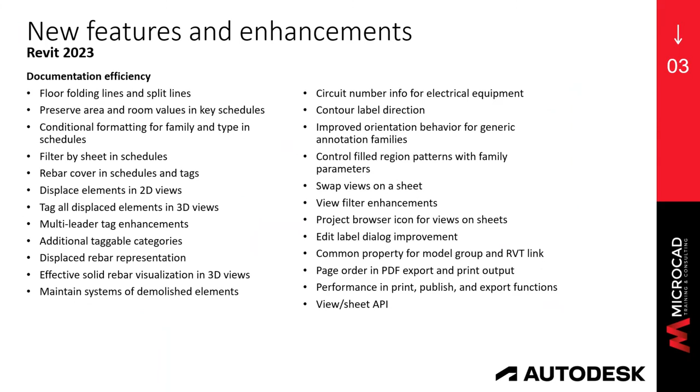Incredible release, huge amount of changes. Just to give you a little bit of an overview, we are not going to see all of them, but my next 3 slides contain all the changes that happened in this release. To make a very long story short, this release has over 70 new features or changes to existing features.

50% of those happened because of user input. I don't know if you guys are aware, but Autodesk listens. Surprise, surprise, Autodesk does listen to the end users. How can you make your voice be heard? There is a website called AUGI, Autodesk Users Group International. You can become members of AUGI, and then you can vote. This release, as I said, 50% of it is user driven.

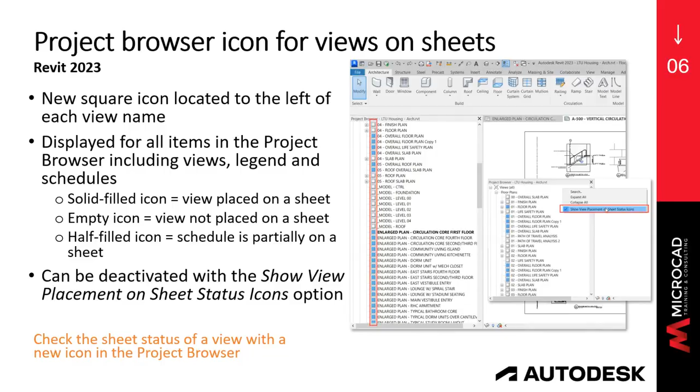So let's dive into it, and I am going to be jumping a little bit between the slides and my Revit interface. The first thing that I'm going to mention is that there is a new icon in your project browser. So let me jump to my Revit interface. Let me select Revit here real fast. And now you see my Revit interface, and if you see in the project browser, there are these funky looking square icons in front of my views.

Some of those square icons are filled out with a blue filling, and that blue filling is telling me that those views are loaded onto sheets, which I found to be very, very useful, because usually you need to select the view and figure out if they are on a sheet. You need to scroll down here, so it becomes so much more visually easy to find.

If you don't want to see them in the project browser and the views, you can right click, and this is where those icons get turned on: show view placement on sheet status icon, that is what it is. I leave them on because the minute I saw them, I was like, yay, me like useful stuff.

Next, and this is straight for MEP, it is huge, it is very, very cool. Let me just grab this air terminal schedule and remove it from this. No, let me leave it on the sheet. Let me show you something new that they added to my schedules.

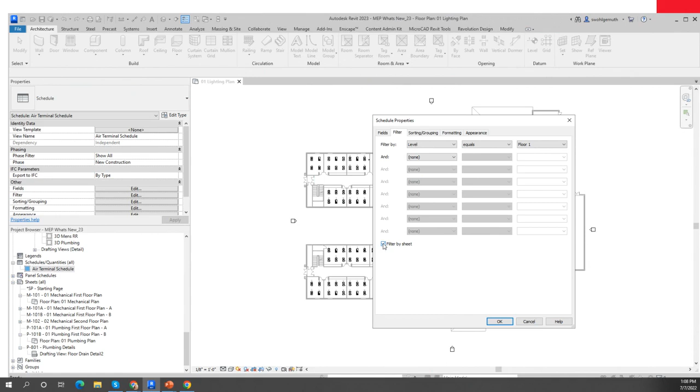So I'm not going to filter right now, and I'm going to show you the sheet where this guy is loaded on. I know it's loaded because it's telling me that it is on a floor plan view, on a view, and it's on this floor plan view. And that is the extents.

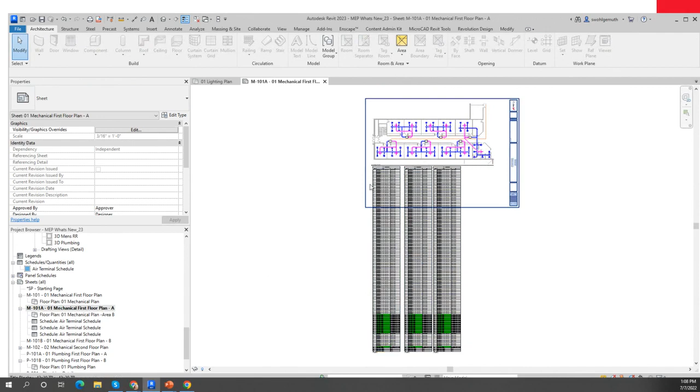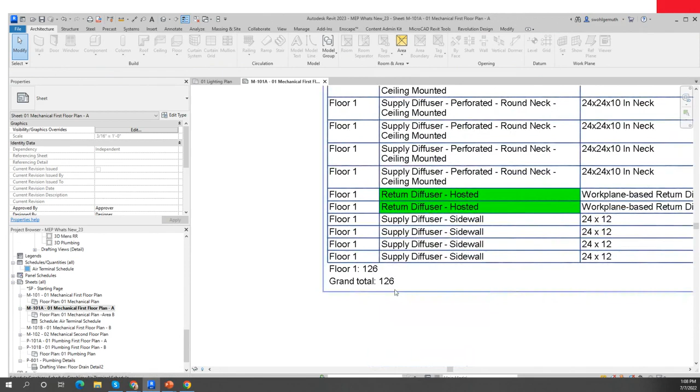Actually, I don't need these guys here, I will need them later on. Sorry about that. This is my air terminal schedule for the whole project—actually, not for the whole project, just for level 1. Notice that it's just for the first floor, and it's calling out all the diffusers that are in that level 1.

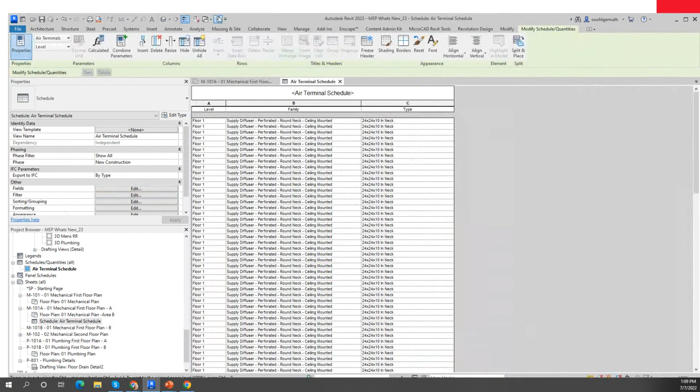If I go back and go to my schedule view, and I go to the filter—let me cancel out of here and let me tile the view so that you can see it nice and clearly.

If I go to my filter and go filter by sheet, boom, now I only see the diffusers that are on the sheet. The way you saw it when you came in, I had just broken up the schedule inside the sheet. To me, that was huge. So many times I have needed to do this.

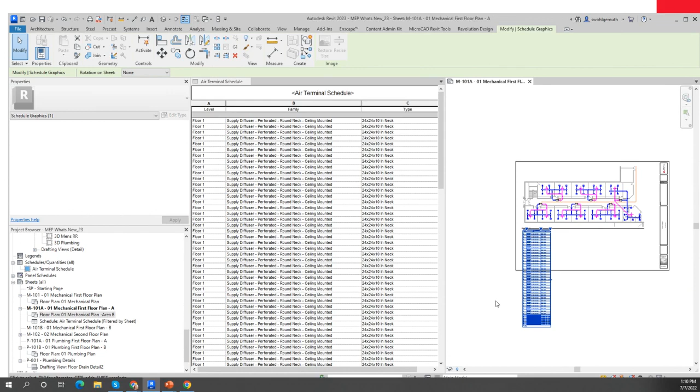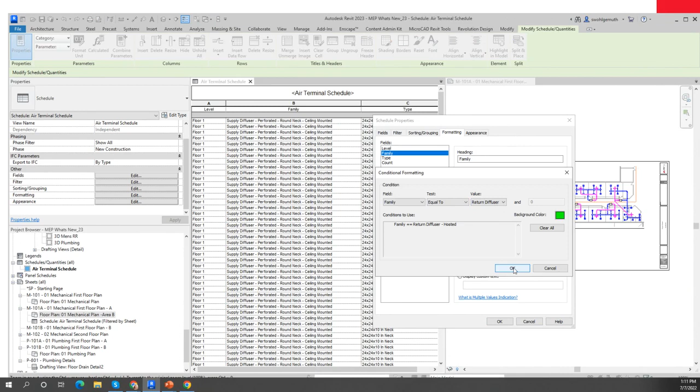Where is it useful? I can highlight with different colors. I decided that I wanted to highlight my return diffusers, so here are my return diffusers. I could highlight whatever family I need to make sure I can separate them, clarify them, make them more visible in my views. I can now add conditional formatting for family or for type or for family and type, and they can be configured independently.

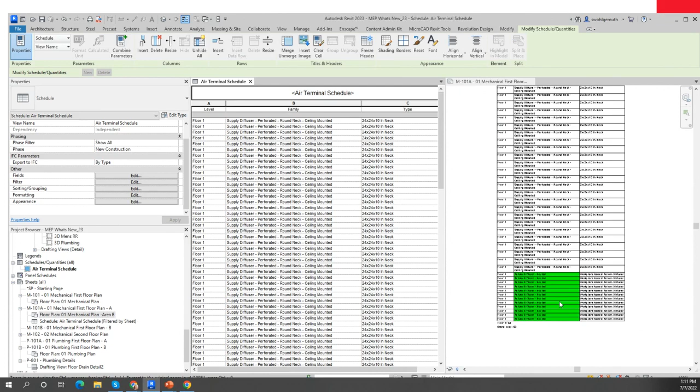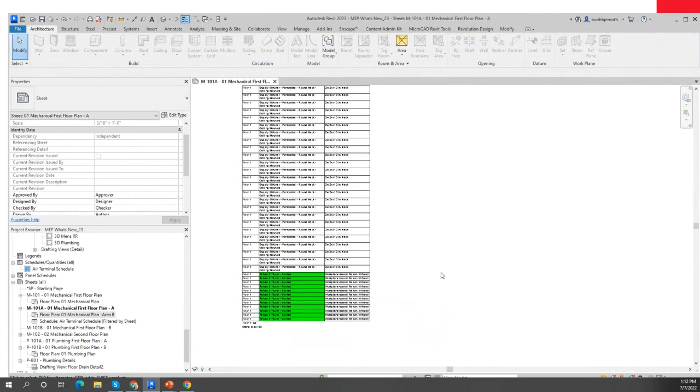Next item that I want to show you, huge. I don't know if you ever fell into an issue that used to happen to me a lot, which is organizing my print sets, printing out of Revit without having a PDF writer in my computer. Impossible, right? You had to have Revit, you had to have a PDF writer.

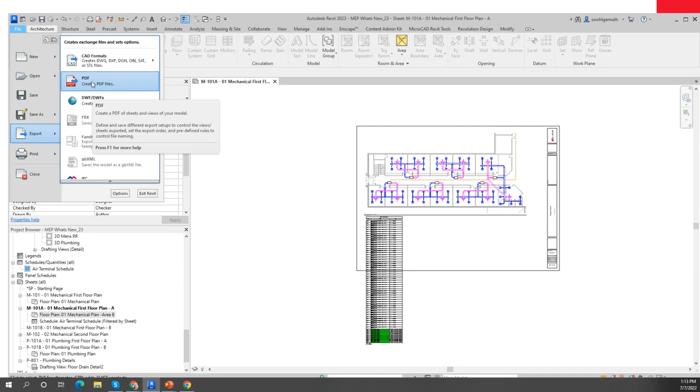As of the release 2022, you can go to your file export command and export to PDF. But you can not only export to PDF within Revit, now you can change the print order of your PDFs, which is huge, humongous. We always had to make the print set, and it did not matter how many subcategories and how organized I had my project browser and my filters and my organization of the print set. This is something that is just available now.

Where is it available from? I can set a print setup, so I can choose whatever sheets I want to print. I'm going to print all my mechanical and all my plumbing sheets. This is the order in which they're coming out right now. But the minute I have a print setup, I can edit the print order, and I can drag and drop. So if I want to push up the whole plumbing package in my print set before the mechanical package, that's the way I do it.

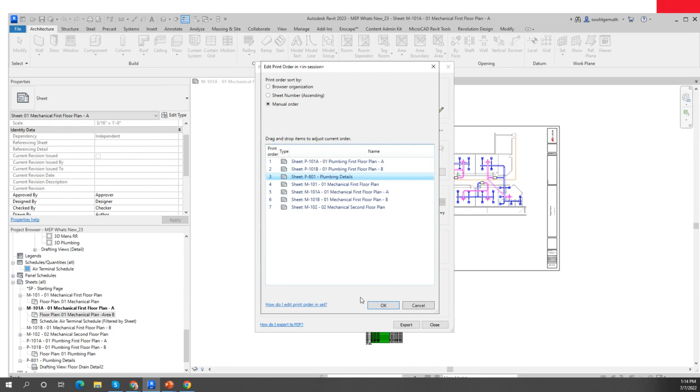Okay, I set this here in the print order as manual. I organize my print order, I click OK. And then I can select this, and I can send it out to print, and it will print in that order.

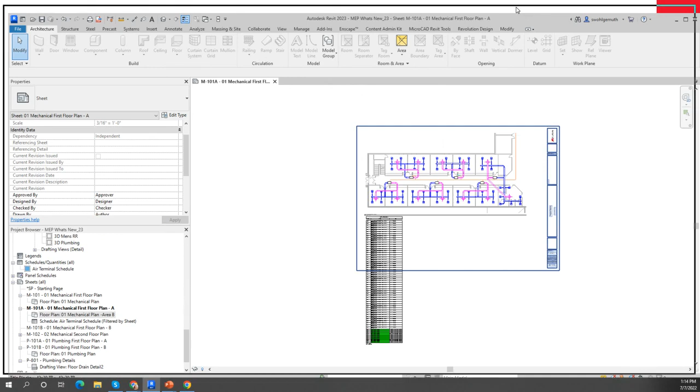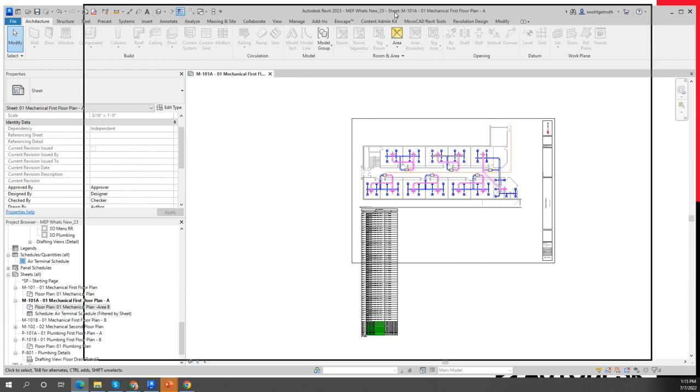If I click export here, just bear with me one second. We have time to show you, to confirm that it does print in this order as I'm telling you. If I go to my documents dialog box and open my PDF, let me drag it out to you. A lot of empty sheets, but notice that all my plumbing plans are before my mechanical plans as I had defined.

Super. Moving on. Sorry, I did something, okay, just give me one second. I am sorry for this, I was messing with my screens, didn't mean to do that. Cool, let me go back to where I'm supposed to be. Revit interface, beautiful, so sorry about that. Back to real life.

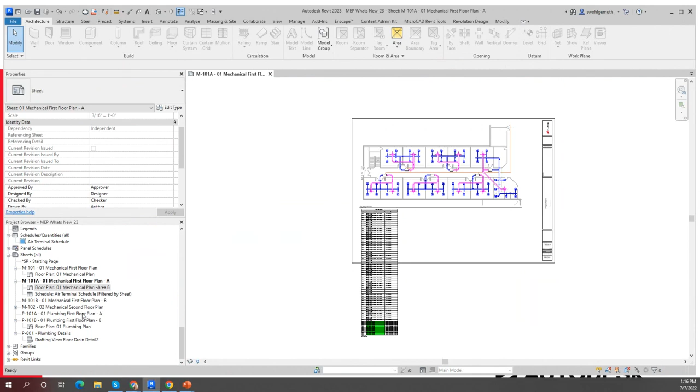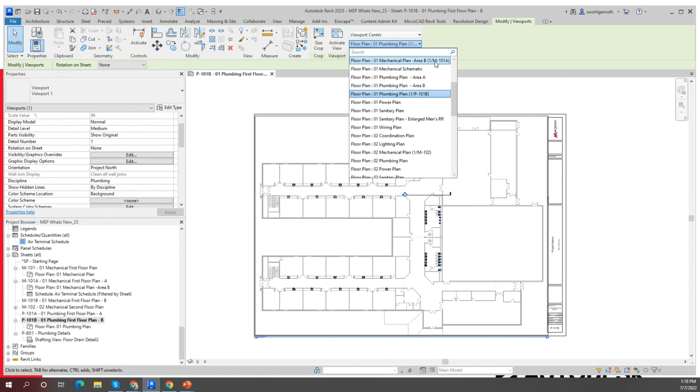Next, and this is also very, very cool. If I change my view, let's come here to my plumbing floor plan, notice that my plumbing floor plan is calling out to be plumbing first floor plan B, but the viewport that is loaded does not correspond to the proper floor plan. In olden times, you had to either select the viewport, delete it, and then go and drop the other view. In more recent versions, you can select the viewport and use this new location on the ribbon that allows you to swap the view that is on the sheet. So I'm going to change this for the proper view, which is the plumbing plan B. Notice that all the views already loaded onto a sheet have these parentheses. So I'm going to swap that view for this view.

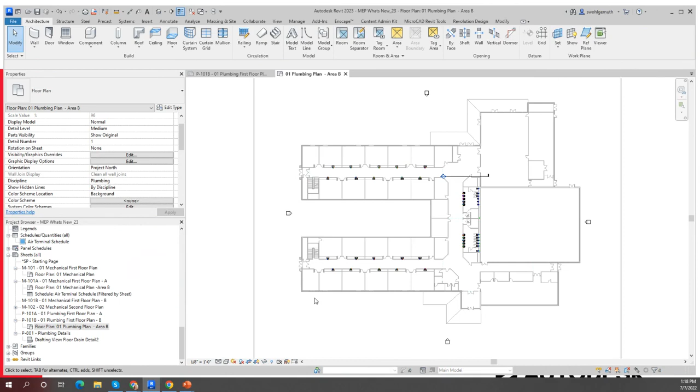Let me just make sure my view is not cropped. And this should have been a smaller crop. Right? And that is the view on my sheet. That is swapping views on a sheet.

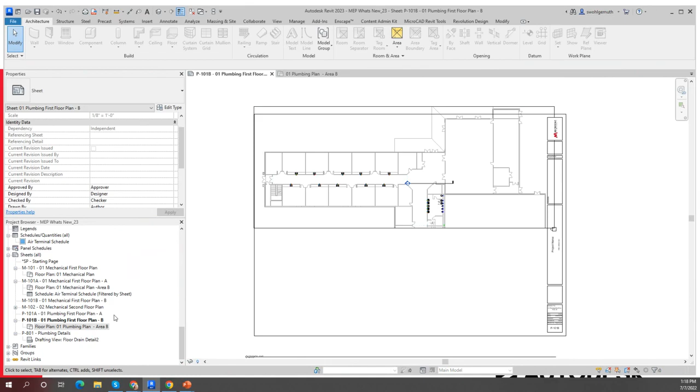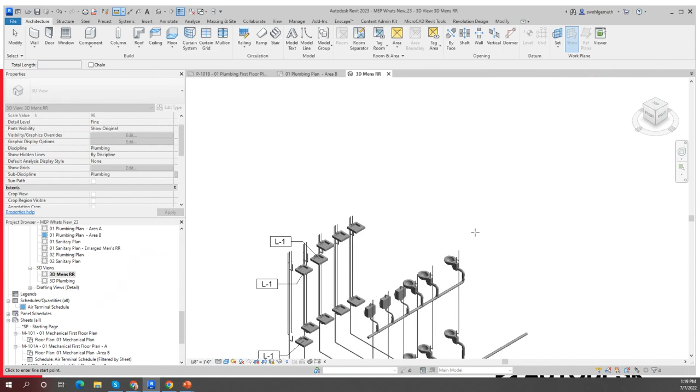Next of the new features, in 3D, now I have the measure between two references tool available, which makes my conversations with clients so much more agile. I can give this distance, or I can force a perpendicular measurement by selecting my first instance, then force perpendicular, and it will find the perpendicular point of that distance and give me in my options bar my distance.

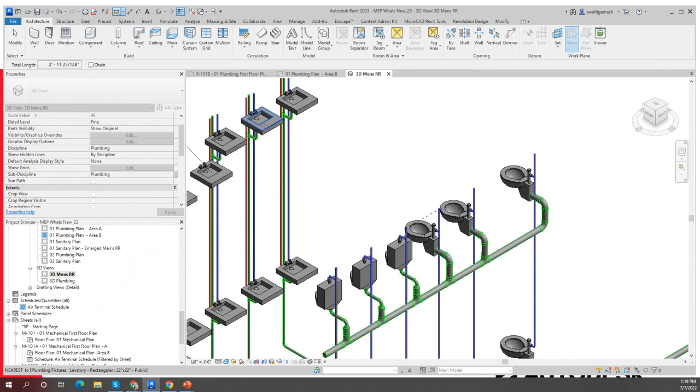Brand new. Another thing that I can do in 3D nowadays is that for clarity of my view, I can displace elements, and I can not only displace elements, I can tag the displaced elements.

So let me start by tagging this water closet here. Right? And let me select the water closet, and then you have the option here to displace the element if you want to show the real connections down here. It helps you in the presentation of your views.

Obviously the tag moves with it, and you will have to change a little bit the location of the tag so that it's all readable. But you can now tag your displaced elements, and it doesn't matter if you tag them when you created the view or after displacing it. So bottom line of this enhancement, it just helps you have better visibility in your views. It all boils down to that.

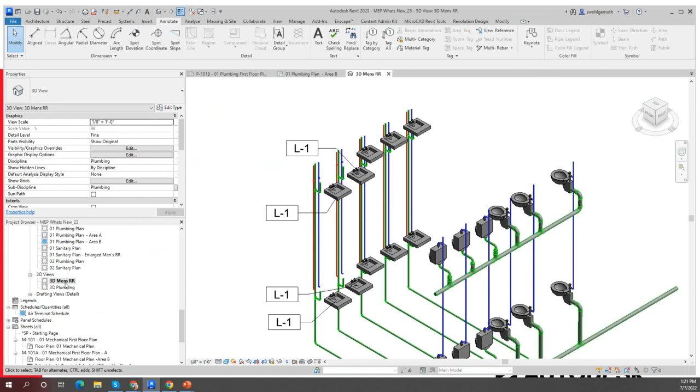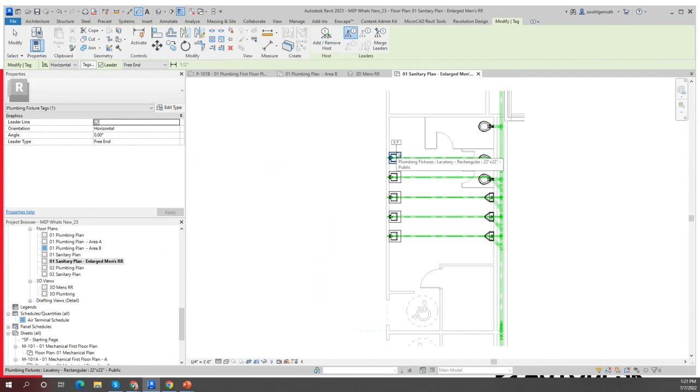Next item, let me show you tags. So if you didn't catch on to the 2022 release, tags now have the option to have multiple hosts, right? So I can tag this lav here. And if I wanted to get away with this one tag for all the lavatories in this location, I can add or remove hosts by clicking on similar hosts all the way.

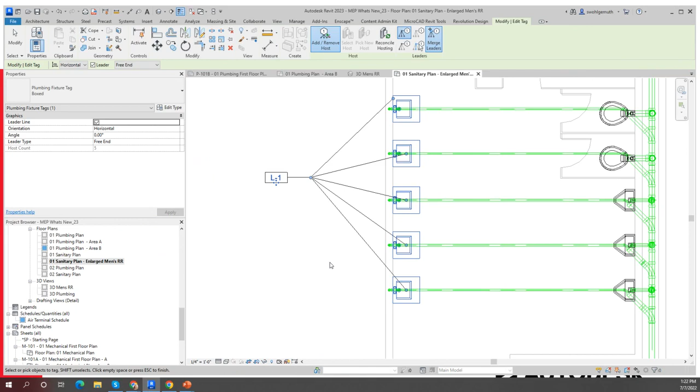And in 2023, now we can merge the leaders. There is a whole bunch of different options for my leaders. Okay? Making life easier and making it possible that my elements look better presented.

There is improvements in the elevation parameters. In the pipes themselves, if I select this sloped pipe here, notice that the pipes right now give me the option to account for upper and top elevation, the bottom elevation, the center line, upper and lower elevation, and it allows me to account also for the lower end of the invert elevations.

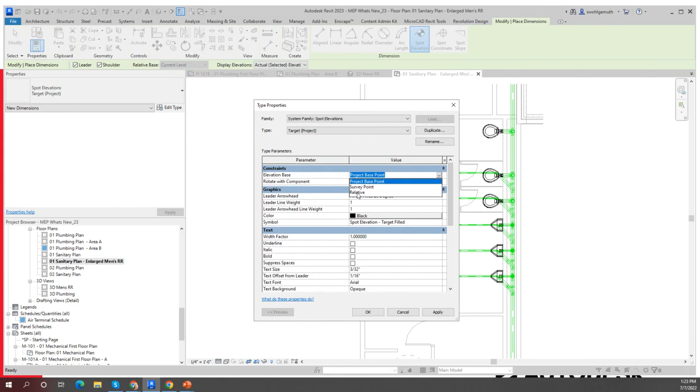Not only that, my spot elevations now have the option for the elevation base. In former releases, I only had the project base point or the survey point. Now I have this relative option also. So again, more options to be more accurate in the depiction of my models.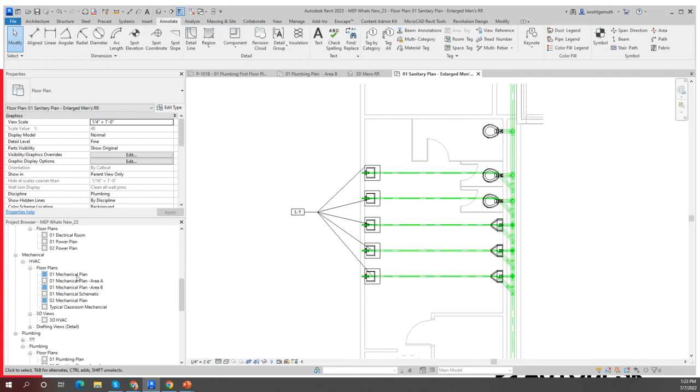Next, this was very exciting for me, extremely exciting. Let me go to the mechanical plan view and let me select one of the mechanical equipment and go to the family editor. If you have created families like this on your own, you know that up to this release, if this connector needed to be moved or changed in any way, the only way to do that was to delete it and create a new one. And then everything you had already set up in terms of its properties and parameters would be lost.

Notice that as of 2023, you can pick a new host and select anywhere, either from a face or a work plane, and place it anywhere else in your family. Huge. If you have done MEP families with connectors, believe you me, I saw this improvement and I jumped. It was happy, happy, joy, joy.

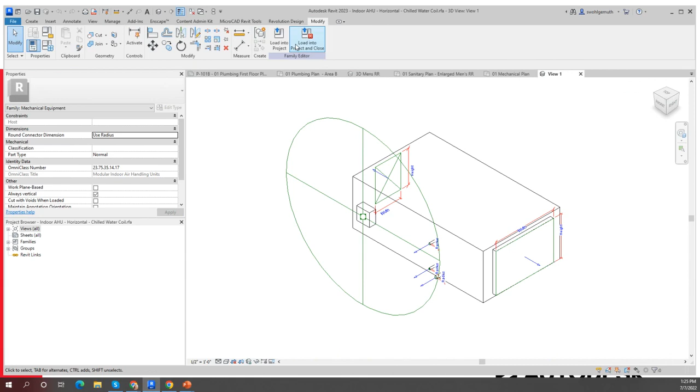The next improvement is that we have added systems families. And again, I know this is user driven because I am one of the people that wanted this to happen. How annoying has it been up to this release that all your plumbing equipment had to be cataloged as mechanical equipment? And then you had to create filters if you had the combined model. At the end of the game, it ended up being a pain in the Watusi.

Notice, 2023: plumbing equipment, new category, brand new category. Also, who has suffered doing mechanical, trying to place your thermostats, your CO2 sensors, and all those elements that are kind of created as electrical devices or fire protection devices, but are not really. They now have their own category, and gone are the days where I had to look for my thermostats and my CO2 sensors and my humidistats somewhere in Timbuktu through this command here.

This made me so happy. You cannot imagine. I mean, that was to me huge, huge.

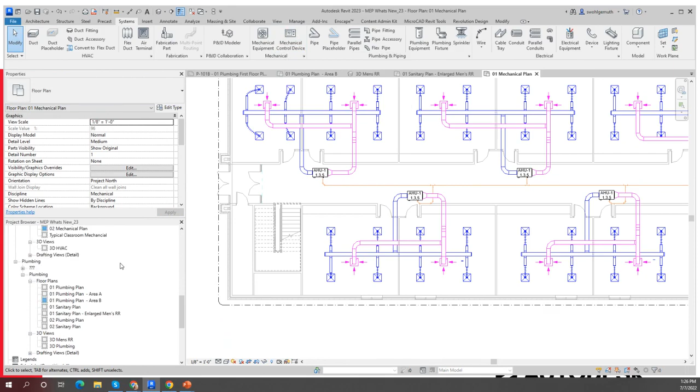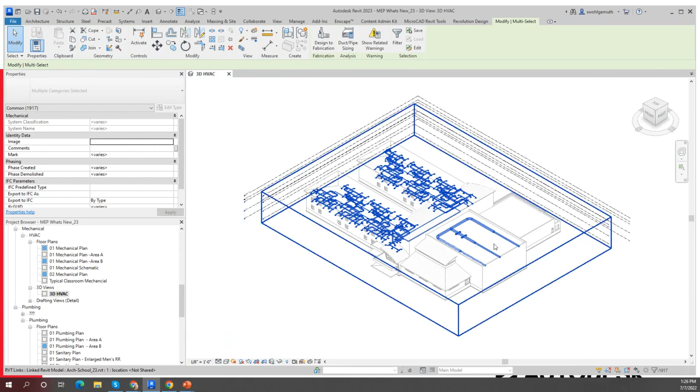Next, this is an interoperability improvement in basic operation of Revit. In a 3D view, up until this release, the minute you would do a big window selection like this one here, visibility of your elements would become completely befuddled because you would get all these little icons, a bunch of little icons there. They don't appear anymore.

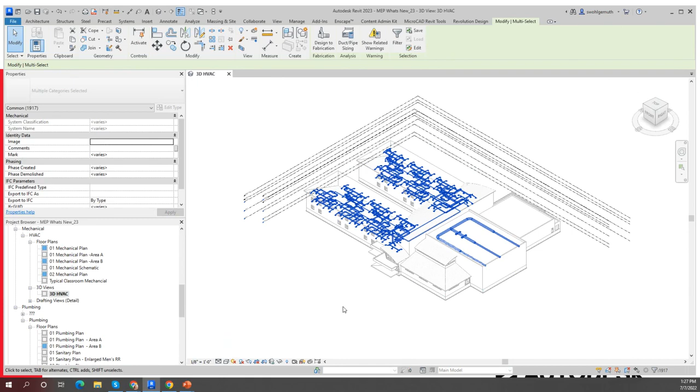Okay? If this were a workshared model, which it isn't, you would have also the icons that tell you to what workset the elements belong. In this release, in a workshared model, you will get in the ribbon an added button that allows you to activate a given workset.

My electrical people, we never forget about the electrical people. Very important for our electrical people.

Up until now, there was no way of doing any prelim load analysis for electrical in Revit unless you had some equipment placed. As of this release, if I turn on my systems browser, you have the option to create an analytical power distribution system. If I go to the analysis tab, you have electrical analysis tools that allow you to create an area-based load boundary. If you've worked with zones in HVAC, it's very similar, but for electrical. It allows you to create an area, then create loads for that area, and then create equipment loads.

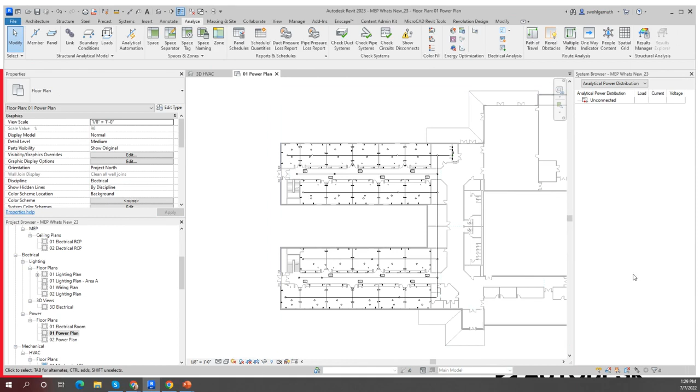Brand new. I have talked about this with a couple of electrical engineers, and they are very excited. I know they were looking for this feature for a long time.

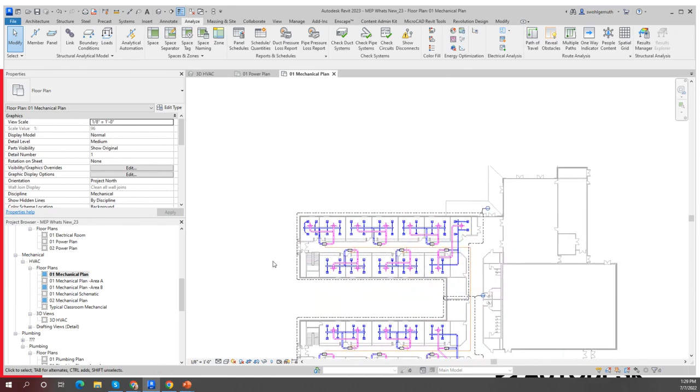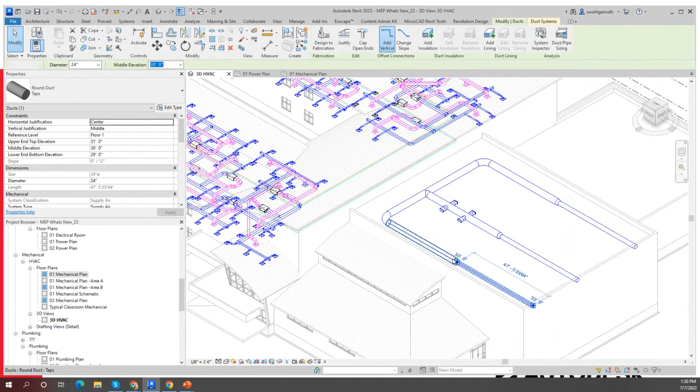Next, if you have done any demolition in Revit, you know how annoying it can be. Let me show you this in the 3D HVAC view. So this is the case scenario: I have ductwork here, right? This ductwork was existing.

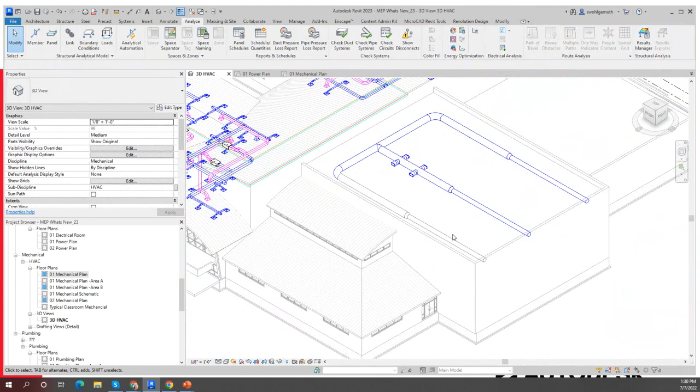I want to replace it. Up until this point, to replace this branch of duct, I would select it, come here, and if it was existing, choose demolish. And the minute I chose demolish, a couple of horrible things would happen. A, I would get a dialog box telling me that elements would be disconnected. B, once elements were disconnected, my duct system would lose the system and the connection.

Notice what happens now in Revit 2023. Ready to be thrilled and excited? Check this out. I select the duct and it has a duct system. It did not lose the system. Let me drag it. It's still connected, all of it. It is demolished and it is connected. To me, that was so huge. So huge, it's not even funny.

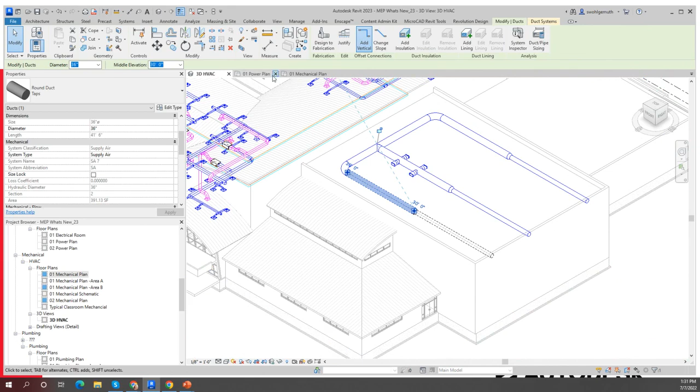Next, back to electrical. We're going to get electrocuted. My panels have a circuit number parameter now, which tells me who is feeding them and on what circuit it is being fed from.

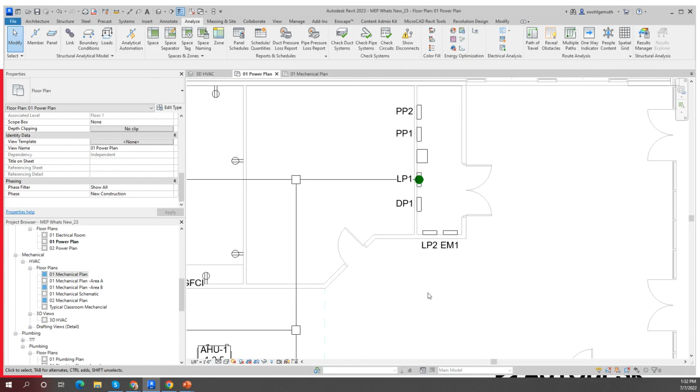That's a short but really cool item for electrical. That parameter can be used not only in the properties palette, but because it's in the properties palette, you can also use it in the panel schedule. I'm not going to go through the whole process of creating the panel schedule now, but it will be listed in the panel schedule, and it will also be available for electrical equipment tagging.

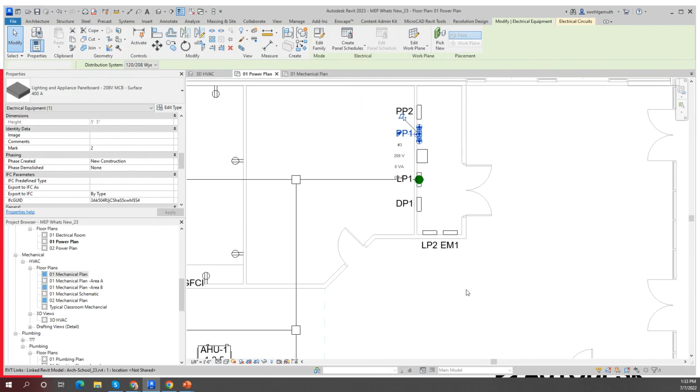Last but not least, this is something that has annoyed a couple of us for a while: these types of families, like sensors, have an annotation family with an M attached to them. They would look okay in floor plans, but would be upside down in reflected ceiling plans. As of this version, they will show up properly in both floor plans and reflected ceiling plans. They don't change direction.

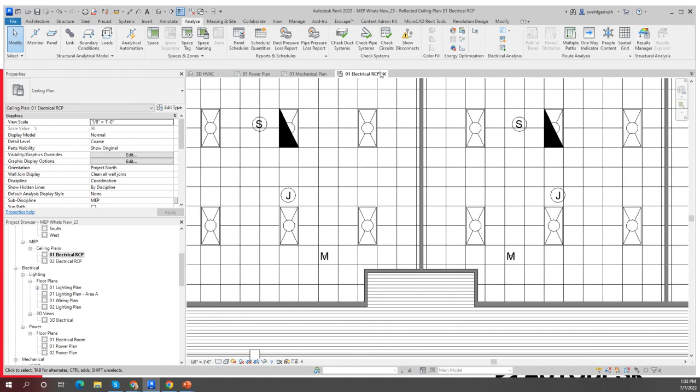Huge, huge. Cannot imagine how many electrical people were annoyed with me because this symbol would show up upside down in coordination views, looking different in the floor plan view than in the reflected ceiling plan view. You'd just sit there and go, yeah, it is what it is.

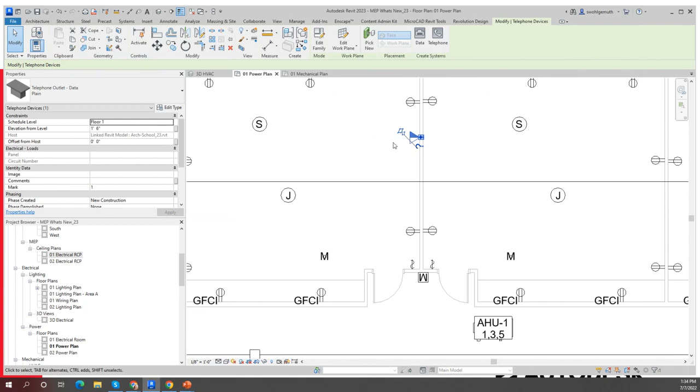Last but not least, it also has to do with annotation symbols attached to families. With outlets like this, we usually like to mirror them, but if I mirrored them, they used to come backwards. If you need to come from former releases of Revit to understand how annoying this was - the black would be down here at the bottom - it was like I cannot mirror elements like this, I have to replace them instead of mirroring, which sometimes is a waste of the time savings mirroring would give.

So all of these are time savers.